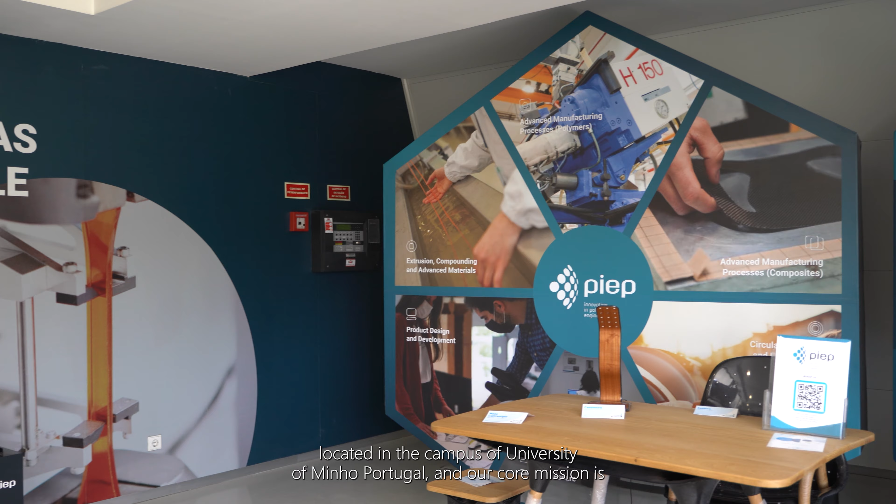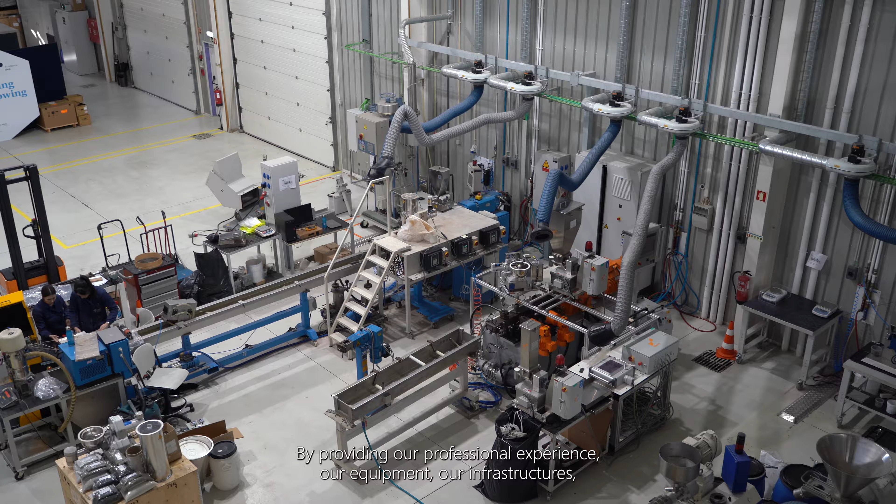And our core mission is to support the companies on their research, development and innovation needs so they can strengthen their competitiveness in the plastic industry and related sectors by providing our professional experience, our equipment, our infrastructures, our manufacturing tools, always basing our work on the promotion of the principles of sustainable development.

We have very complex projects, and in one particular case we used Moldex on a product development that consisted of a system with very different parts that had to fit all together. Dimensional accuracy was essential. Also, due to the type of application, the selected material was highly loaded, making it very difficult to inject. In the beginning, we used Moldex3D in order to optimize the geometry for injection molding.

Likewise, once again, we used Moldex to support us on the design of the tools. Thanks to the software, we were able to do several virtual trials testing different types of gates, sizes, locations, cooling systems. And only after we were confident in the results, we decided to go forward with the tool manufacturing.

After the tool manufacturing, we used Moldex3D to determine the most suitable processing parameters. And it was then during that study that we realized there were potential defects during production. In this case, the warpage that was not acceptable for this type of product.

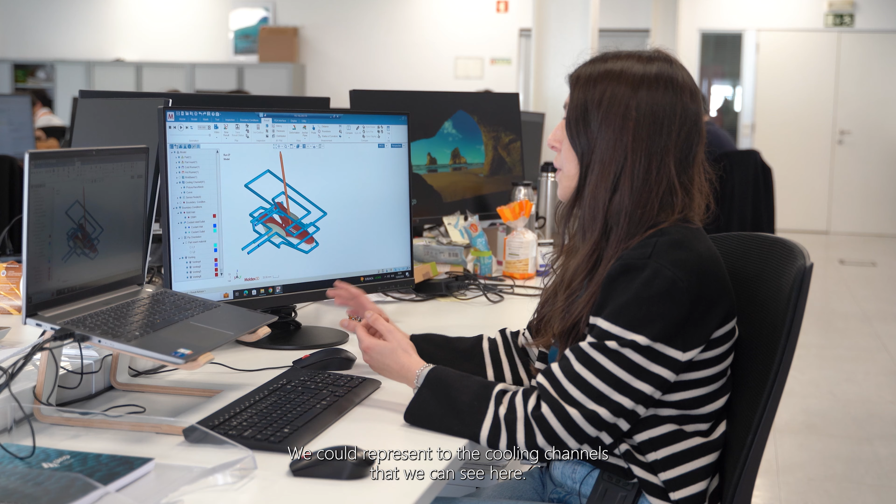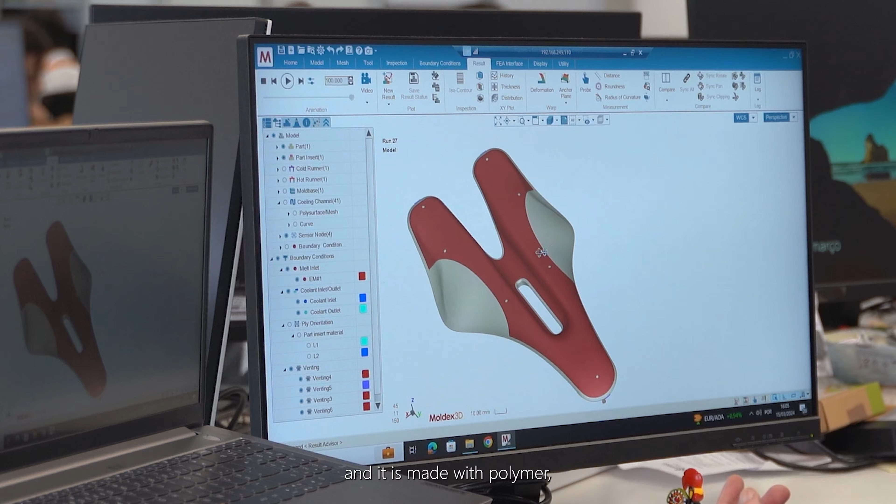We could represent the cooling channels that we can see here. We represented the injection system. In this case, it is composed of a hot runner and then also a cold runner. And in this case, we have the part that is a bicycle seat, and it is made with a polymer, a plastic polymer, and also with an insert.

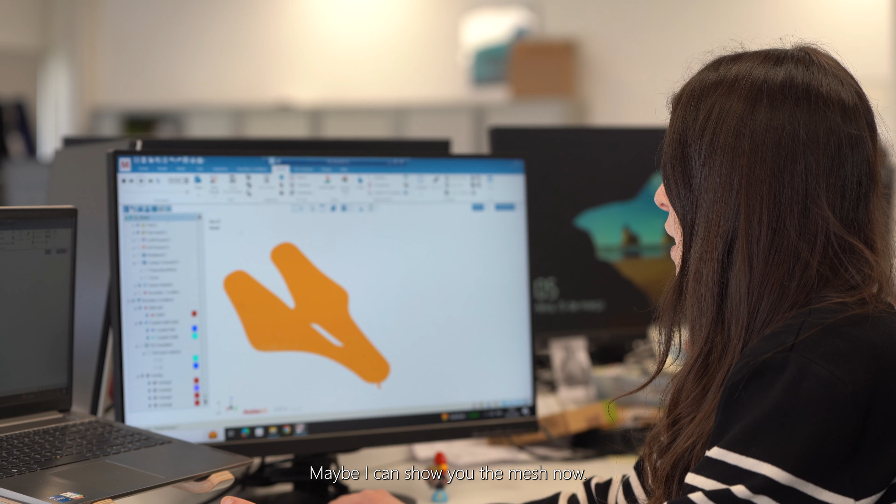In this case, a prepreg, a pre-impregnated, that is included in a mold. So here we have the overmolding of the prepreg. Maybe I can show you the mesh. This is the mesh that we have done. We represented the venting system. We can see probably here at the end the ejectors, the extractors, that also work as the venting system for this part.

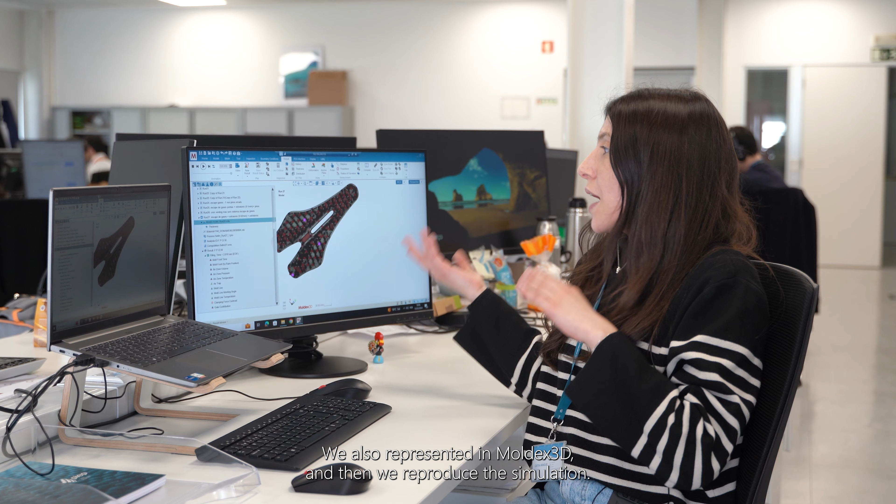In the physical mold we had inserted some pressure and temperature sensors in the cavity. We did the same study and the same analysis here in Moldex. These probes that we can see here in pink are the same pressure and temperature probes. We also used the machine that we have here. We also represented it in Moldex and then reproduced the simulation.

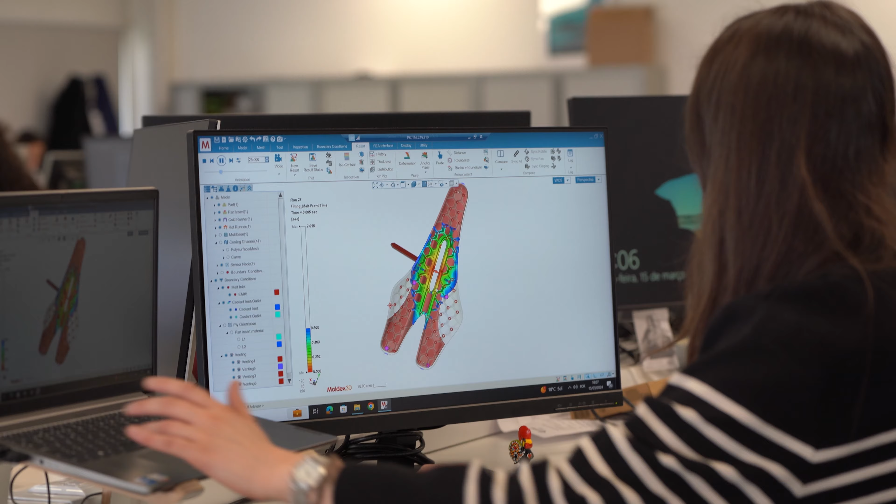Here I can show you some results. We observed, for example, the filling pressure, the filling profile. Okay. Things that we have seen, the pressure, the pressure graph in the probes.

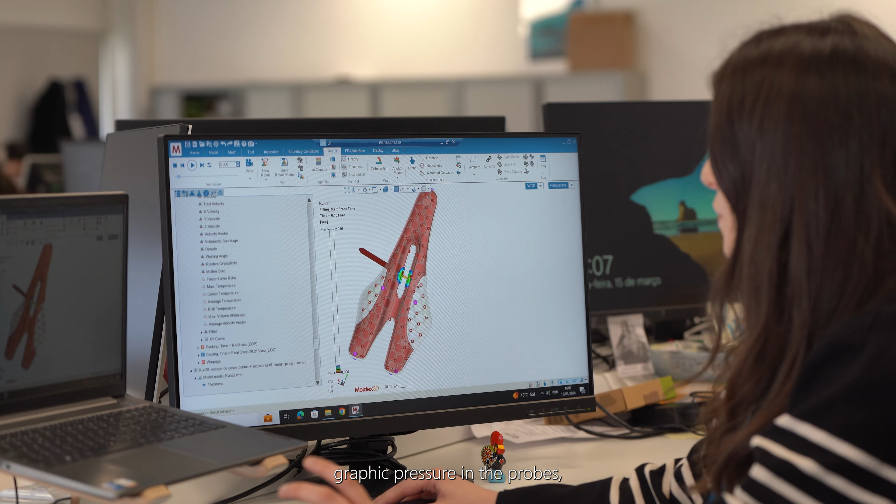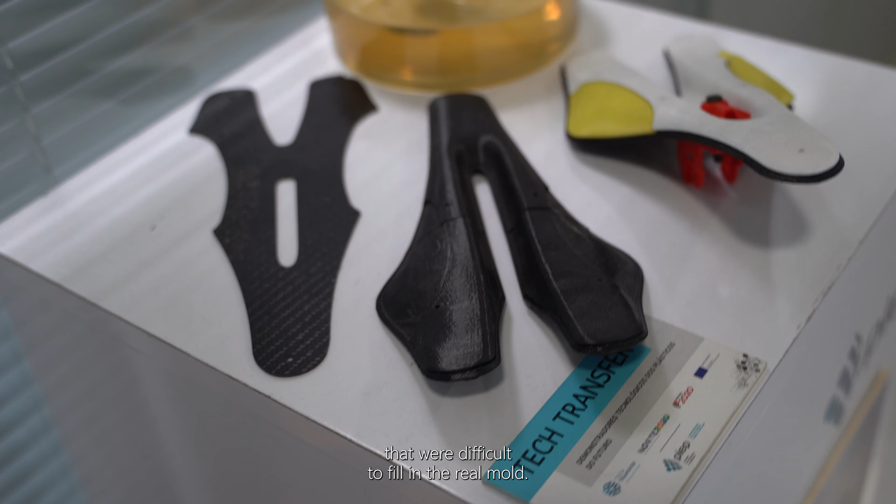We also did another process simulation with and without the venting, because in reality we had some difficulties with the venting, and we also reproduced that, and we have seen, for example, the same parts that were difficult to fill in the real mold. We could see that in the process simulation. We have compared the warpage and the dimensions of the parts.

So we have been using Moldex since 2017, and this enabled us to witness the evolution of the software, and we could see year after year the addition of new features and functionalities. We noticed that Moldex3D is embracing new themes like smart manufacturing, digital transformation, smart machining and artificial intelligence. And since this is also part of our strategic vision, when we look to the future, we see ourselves continuously working with Moldex.